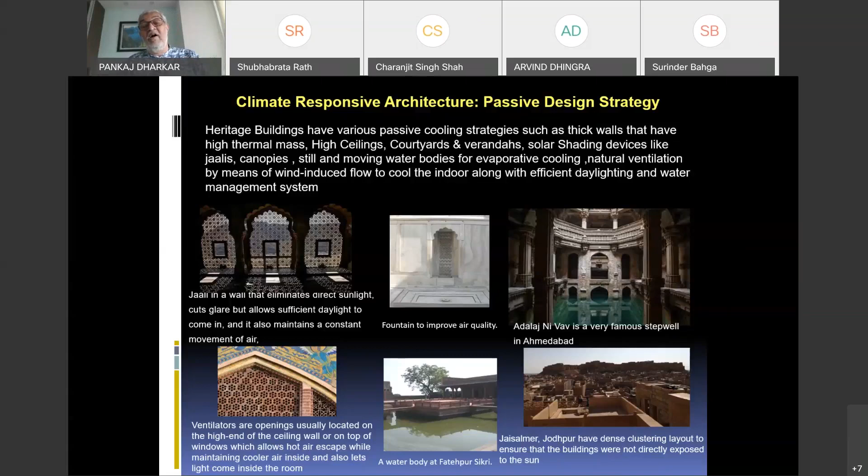If you see in our Gujarat itself, Adalaj ni Vav, that's a stepped well. Several kinds of ventilation which have been practiced, or a water body in Fatehpur Sikri, or the architecture of Jodhpur and Jaisalmer. These are all very passive design strategies and climate responsive architecture, standing stock for several hundred years.

Look at the Taj Mahal, number of passive technologies to keep interiors absolutely airy. Fantastic examples which the globe gets from India, and we have not taken advantage of such beautiful monuments, and probably not integrated our architectural and engineering services.

In fact, just 72 hours back, on a Lothal project in Gujarat, I was proposing a radiant system, and the architect was saying, Pankaj, what will happen if it doesn't work? I had to give him the example that look at Taj Mahal, it is standing tall for several hundred years. So why are you fearing?

So many architects don't want to even try these technologies which have existed for hundreds of years. Unfortunately, we have not integrated them into our architecture.

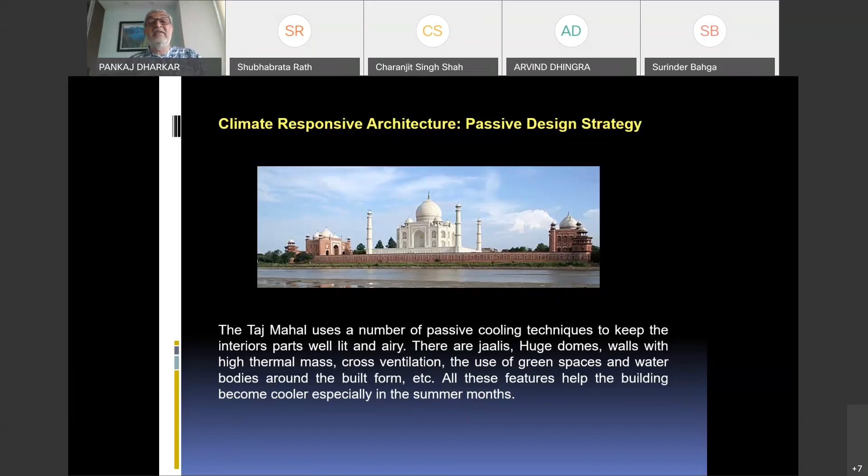Look at Taj Mahal, Hawa Mahal at Jaipur - such a beautiful Venturi effect. We have not taken advantage of such Venturi effects. Probably we have not scientifically analyzed how these jet velocities got created.

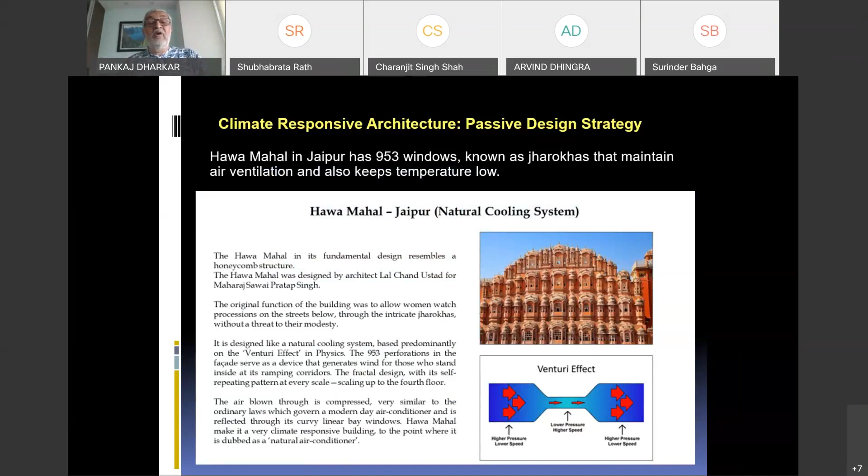Even a place like Jaipur, which was hot and dry, shows how the cooling effect gets created with Jali design. And this requires a lot of research work. I'm sure the next generation can take full advantage of it.

In the last 25 years we have not practiced it, but I am very confident that new generation architects are going to learn from our mistakes and ensure that these heritage examples which we have in India are nicely implemented in modern architecture.

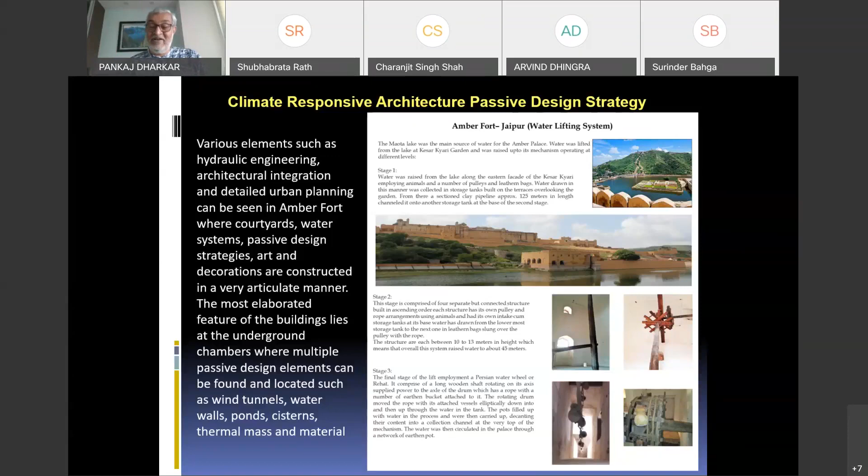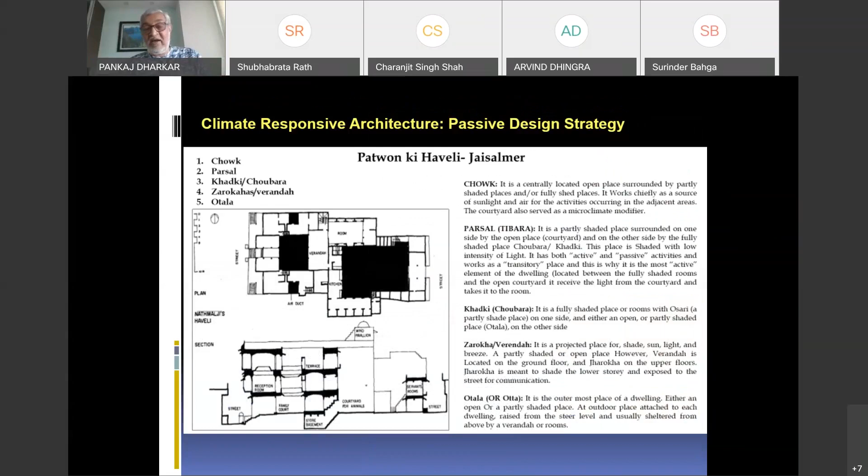Look at the Patwon Ki Haveli, Jaisalmer, again a very hot and dry climate, how the courtyards and the stacking effect created this beautiful cooling effect.

I belong to Indore. Near Indore we have a beautiful place called Mandu, which is 2,500 feet above sea level with no source of water. The river Narmada is 2,000 feet below this Malwa plateau, and all the rainwater coming onto it, about 40-45 inches of rain, is so beautifully channelized. There are such beautiful examples of rainwater harvesting that I think we don't require to go to the outside world. This is India which can teach them.

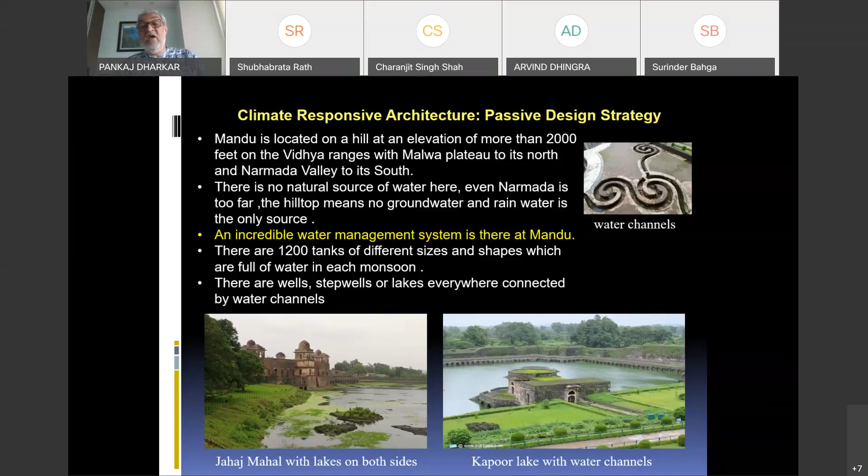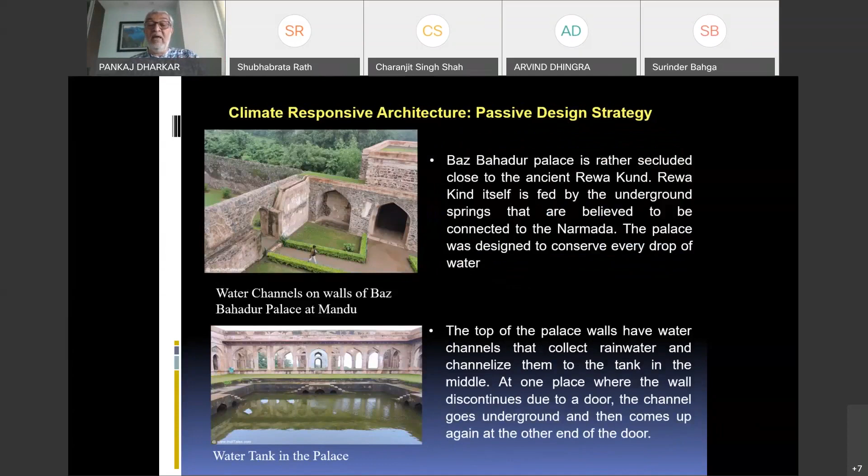Look at the water channels, water bodies, even the courtyards - everywhere there are extraordinary examples of rainwater harvesting, whether it is Baz Bahadur Mahal or courtyard tanks.

It's fantastically done. So friends, passive technology takes advantage of local environment, maximizes comfort and minimizes energy use, and addresses any climate change response. It has been seen that passive technologies like ventilation, windows and wall shading devices, natural cross ventilation, trees, water bodies, courtyards, verandas and thick walls are very effective in maintaining indoor comfort conditions.

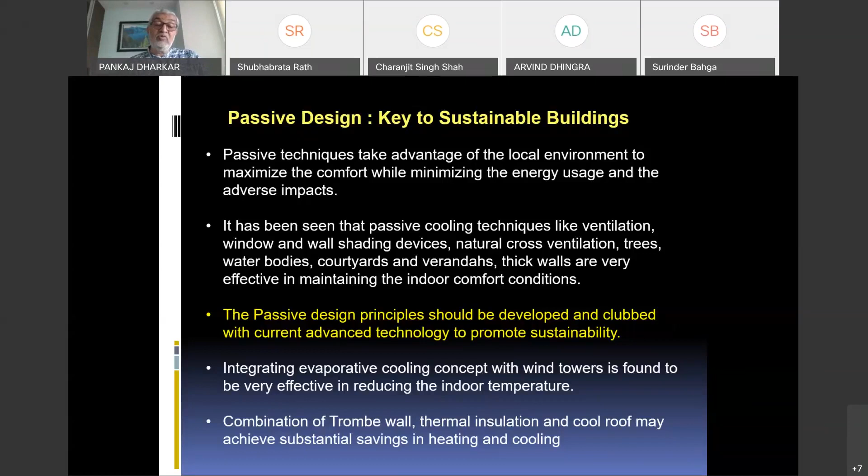Passive design principles should be developed and clubbed with current advanced technologies to promote sustainability, which is what we at ASSOCHAM are promoting. Integrating evaporative cooling concept, as Charanjit Singh ji just mentioned, with wind towers is found to be very effective in reducing indoor temperature. A combination of trombe wall, thermal insulation and cool roof may achieve substantial savings in heating and cooling.

Friends, we have several new examples which are coming up, but I really feel these examples are not to the extent needed, as we all know that 70% of India still needs to be built by 2030.

If you see examples like one I was fortunately associated with at the primary concept stage with Nimish Patel Saab - he is no more, we lost him a couple of months back - a fantastic architect who designed the Udai Vilas Palace of Oberois in Udaipur. This is a live example. He did it 20 years back, adopting the latest technologies with passive architecture. This building consumes just one-ninth, and it has been standing for 14-15 years now.

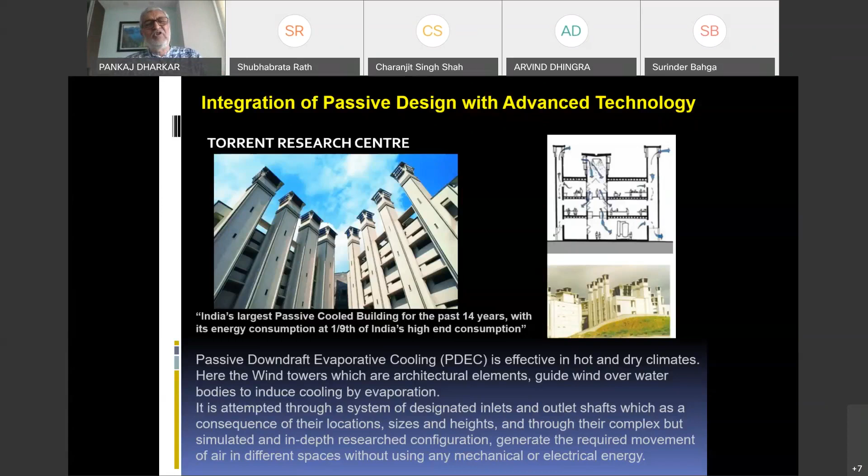But how many such examples exist? Very few. I think the new generation listening to this, and delegates, must learn from several good examples which exist in the country, and we should ensure every building that comes up in future has passive technologies.

With this vision in mind, ASSOCHAM GEM is giving a lot of emphasis on passive architecture, heritage in architecture, and climate responsive architecture in our program. With 400 chambers and 4.5 lakh members, we want to ensure our country competes in business globally, and I think the built environment is going to play an extremely important role.

With this, ASSOCHAM has taken a green initiative to care for Mother Earth, and with that intention CGEM has been formed and is now working very actively. Our program goes from GEM 1 to GEM 5 - GEM 1 being lowest with 40 to 49 points on a yardstick of 135 points, and GEM 5 given when you exceed 105 points.

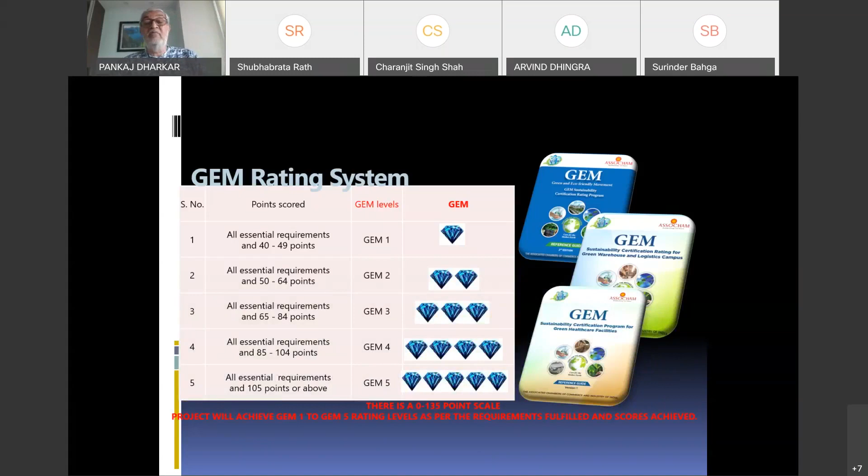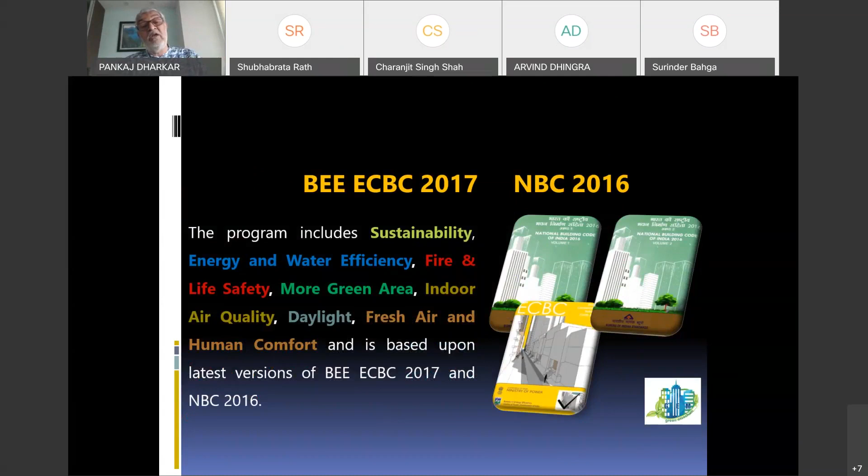Our program includes sustainability, energy and water efficiency, more green areas, indoor air quality, daylight, fresh air and human comfort. This is the only program in the world which also addresses fire and life safety - you'll see today's program is also supported by FSAI. We believe a building has to be sustainable, energy efficient, maintain good indoor air quality, but also be safe from a fire and life safety perspective, so we have a special credit for it.

GEM is continuously improved to align with United Nations SDG 2030. It is the first comprehensive rating system in the world to recognize sustainability as a whole rather than incorporating just a few components. Friends, we have started getting recognition from various state governments, and it is a testimony that recently the Rajasthan government has taken GEM along with IGBC, USGBC and GRIHA certification, extending all the facilities they extend to other green building certifications.

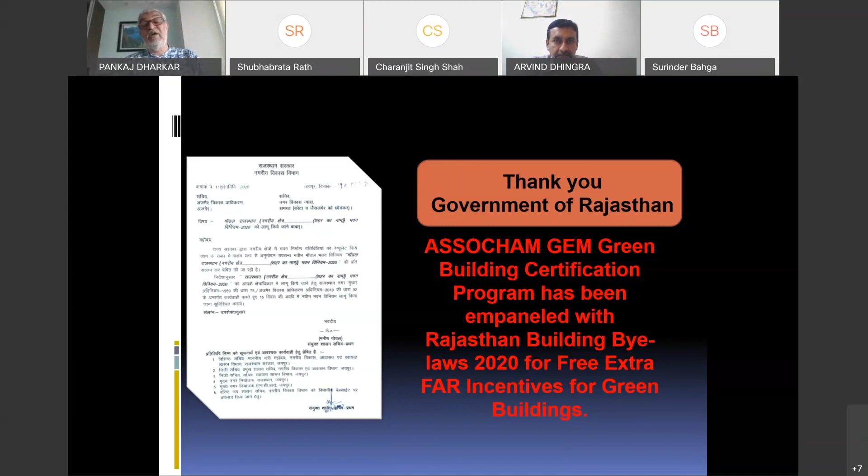I'm sure under the able leadership of Surinder Bahga Saab and our other team members, we are going to get this recognition in Punjab very soon. I'm confident, sir, and looking forward for these days.

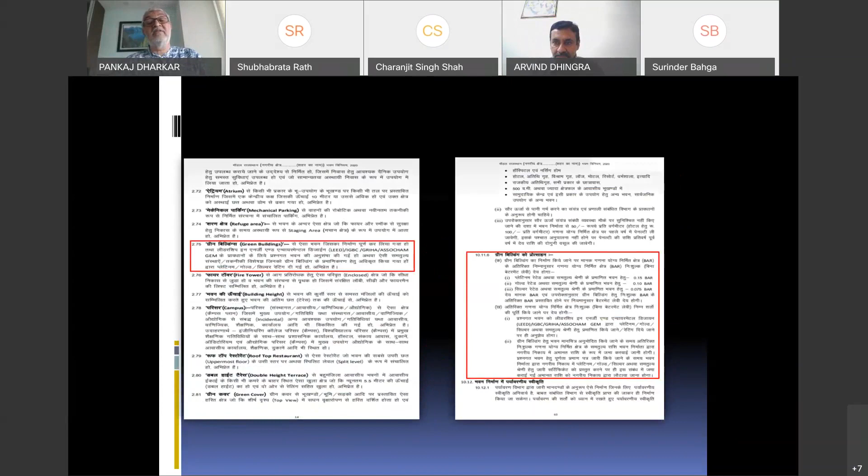You can look at how Rajasthan government has recognized this, and this is also now recognized by CRISIL, the organization which is putting GEM along with the IGBC, USGBC, and GRIHA certification program.

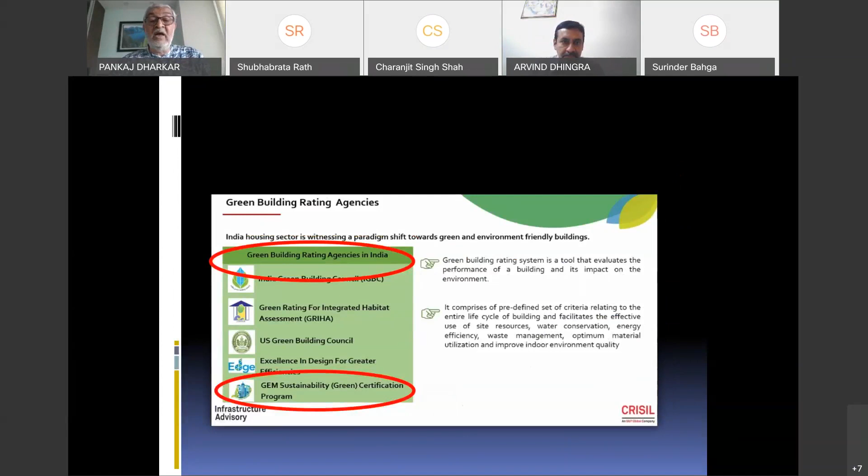We believe that for any green building certified project, if it is the starting point, there are no additional costs. But if for certain technologies you are putting in additional cost, you will surely get a payback within 3 to 4 years. And friends, these buildings are meant for 50 years, so this payback of 3-4 years is nothing, because you are going to save year after year. This is what sustainability is all about.

You can see here buildings from universities - there are multiple universities. Very interestingly, the Kartarpur land port terminal in Punjab, done by none other than our good friend Charanjit Singh ji and his son and team, which they gifted to our country, is also GEM certified - GEM 5 certified, the highest rating given to that important project.

We are unable to share our presentation. Can you help us, Shubha? Please give us permission. Done, sir, you have the presenter, right? Yeah. Since time is short, I will rush through the presentation because many other speakers are in the pipeline. I'm going to talk about climate responsive architecture. Sorry to disturb you, sir, can you make it full screen mode? We cannot. Okay, full screen. Thank you, sir.

In most historical religious scriptures, there is mention of preserving the climate and saving the environment. These are lines from the Holy Purana which lay a lot of emphasis on trees. Likewise, as Shah Saab has said, there are many shlokas in the Holy Guru Granth Sahib emphasizing saving water and saving earth. Similar sentiments are written in the Holy Quran, with many ayahs saying that we should save the motherland. The Bible also conveys the same kind of wisdom to mankind, that we should save the fertile land, for only then can we eat its fruit and enjoy this earth.

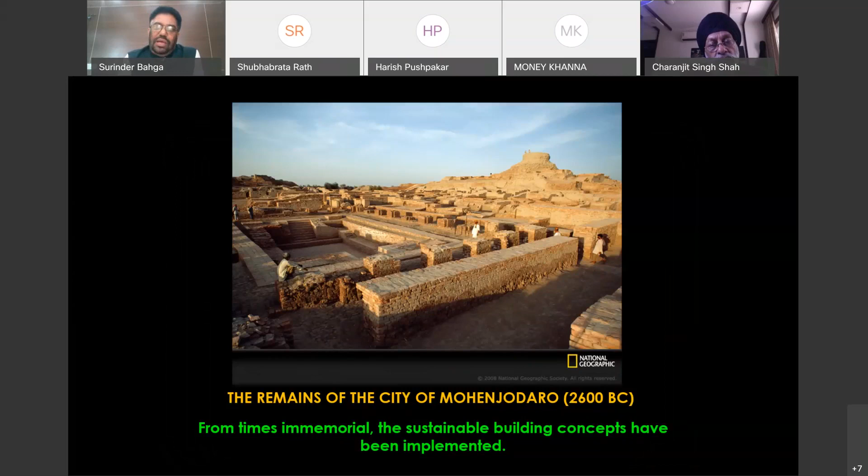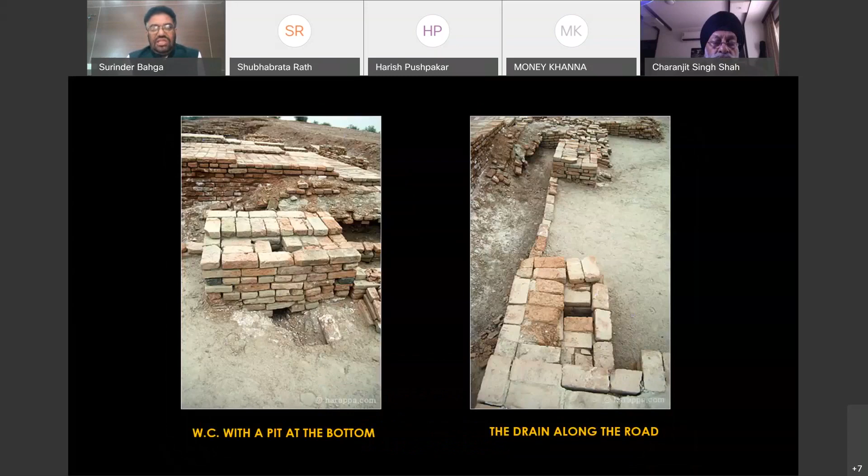If we have a quick look at the historic architecture of India, in the Mohenjo-daro township there was a lot of focus on respecting the topography, the wind direction, and local materials. There was even a drainage system which was properly laid down. This was a 2600 BC project, so ancient, yet the people were so advanced.

And in Havelis in Jaisalmer, as Mr. Dharkar was saying, we have used local materials, courtyard planning, jharokhas and jalis to protect the buildings. Nearly 200 years of the Mughal Empire, architecture was quite excellent in India. There was the landscaping of Taj Mahal, and in the 17th century, Jahangir Palace was built in Orchha, which has thick walls, and all the windows are protected with chhajjas and projections. This is the kind of architecture India was having.

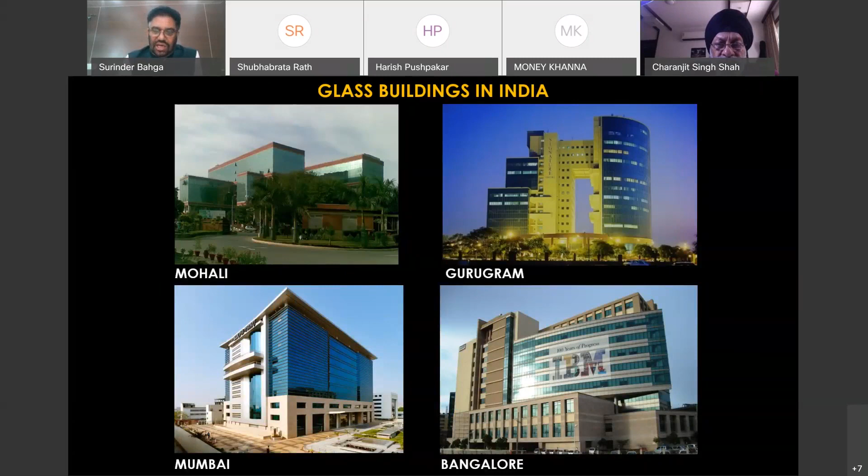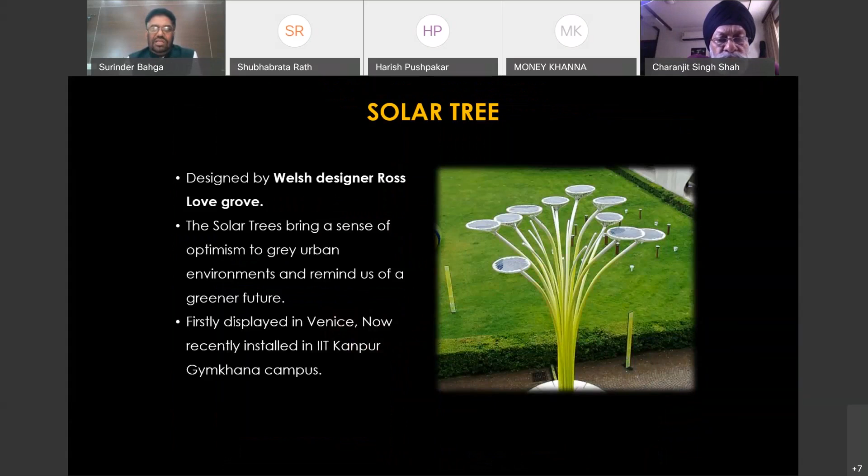I will briefly talk about some new technologies. This is the solar tree. When we have less area and need more light, this tree designed by Mr. Ross Lovegrove from Wales comes in useful. He has invented this solar tree, and in many parts of India, this is being installed.

Another South African architect, Shaun Killa, has designed this Bahrain World Trade Center, about 800 feet tall, with 2 towers connected together by 3 bridges. All 3 bridges support wind turbines, which are as big as 95 feet or so, and they can be repaired through these bridges itself.

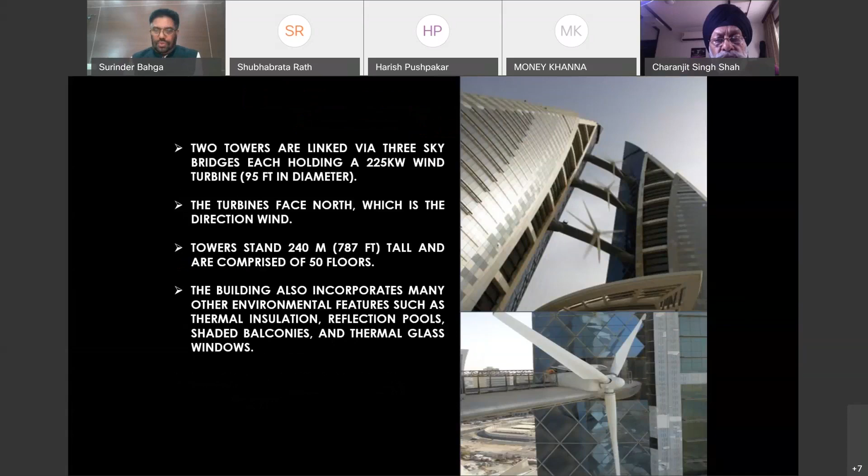The architect claimed that 15% of the total energy consumption of this building can be met with these wind turbines. This is the close-up of these wind turbines.

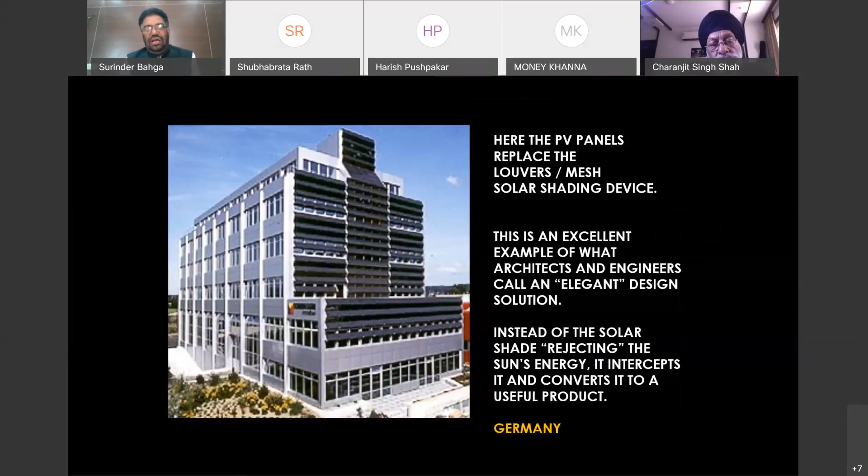The conclusion of the talk is that India is divided into different climatic zones, and each zone has its own guidelines. We should adopt new technologies and design buildings suitable to the local climatic conditions. We should not follow Western concepts, because by copying Western concepts, we will be damaging the Mother Earth. Thank you so much.

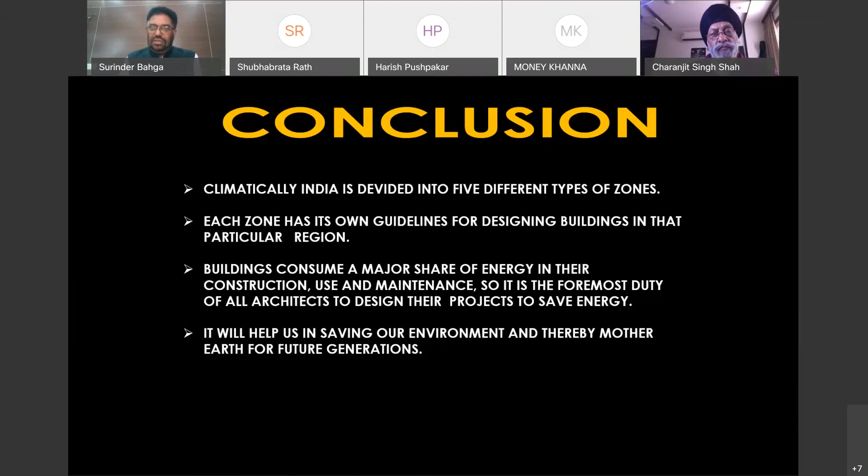Thank you, sir. So the emphasis was on the 5 elements of nature, as you can clearly see. Mr. Bagha gave clear indications from Matsya Puran, Guru Granth Sahib, Quran, and Bible, and he started with the great design called Weathercock in Chandigarh. Then how everything was designed so that vertical things can be used also—the solar, vertical farming. I worked in the World Trade Center, Bahrain, with the same construction contractor that built this World Trade Center. So I could completely relate to all these things, the architects and the beautifully designed passive design strategies, plus the urban strategies coupled with solar and vertical farming, the different kinds of concepts. And now we'll move to our next presentations.

Good afternoon, everyone, and the elite panelists with me. It's really a pleasure to be in such a gathering and talking on climate responsive architecture. I would just go through the slides first, then put forth my point of view. My co-speakers have already shown some buildings which are climate responsive, but have not gone back to the era beyond the Mughal era. So let me go back a little more and see what we have.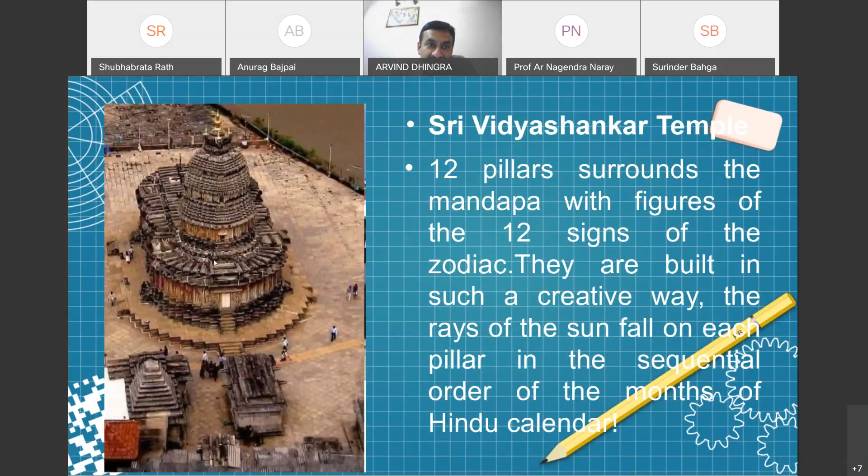Another example is the Vittal temple. Here, all 12 pillars are made of the same granite, but each pillar, when struck, produces a different sound. Again an architectural marvel, standing for over 2,500 years.

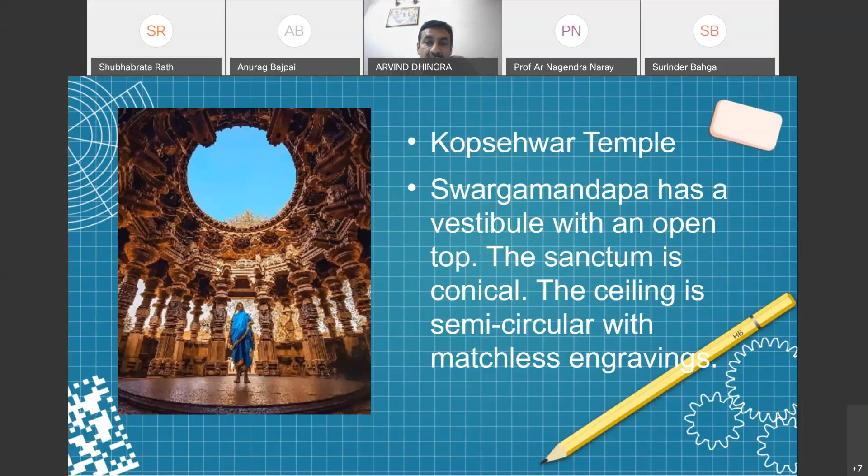Another example, the Kopeshwar temple. Here, the Swarg Mandapa has a visible vestibule with an open top. We are trying to create some kind of buildings nowadays with this kind of top covered with a transparent cover. The sanctum is conical and the ceiling is semicircular with matchless engravings. This is again an example of architecture.

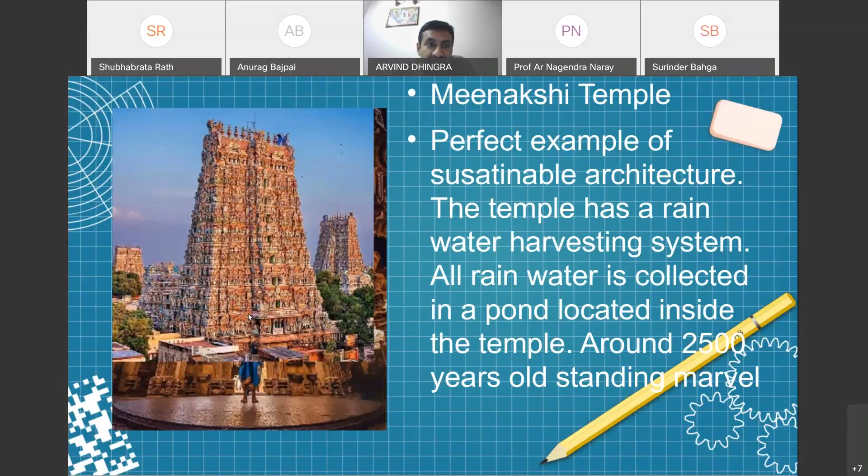Another example is the Meenakshi temple. It's a perfect example of sustainable architecture. The temple has a rainwater harvesting system built prior to the Mughal era. Not even a single drop of rainwater falling on this temple goes to waste; it goes into a pond located inside the temple. So we had climate sustainable buildings.

Another standing example of an inverted temple building is the Rani Ka Vav, located on the Saraswati River. The Saraswati River, as we all know, is nowadays not visible; it is said to be an invisible river. This is one of the oldest and finest step wells in Gujarat. Steps lead down through multiple levels with lines of carved pillars, and more than 800 sculptures. The step well is made in the form of an inverted temple, highlighting the sanctity of water.

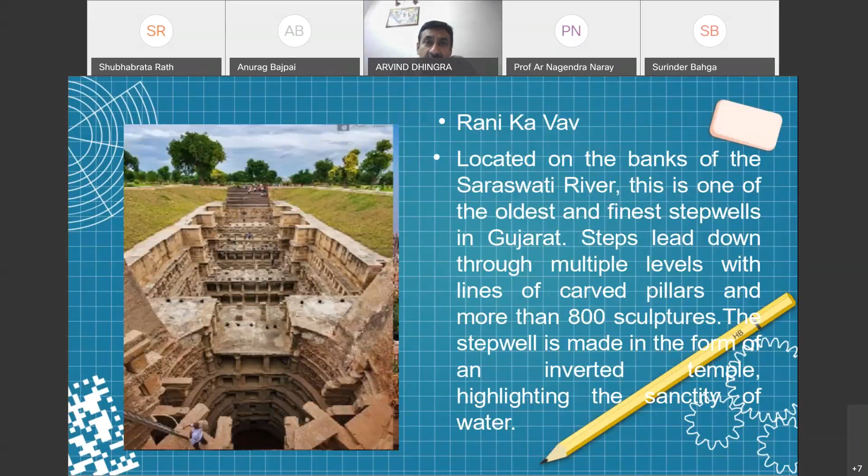So from the beginning, from the mythological eras, we were all inclined towards climate sensitive buildings. Now, moving to the modern era, we have some buildings which show Indian architecture in present day's light. We have divided the Indian scenario into 6 climatic zones.

If we talk of hot and dry climate, as in Jodhpur, the example is the Solar Passive Hostel in the University of Jodhpur. It was designed by leading architect Vinod Gupta, and the building was an attempt to test as well as exhibit methods that would provide thermal comfort in the hot and dry climate of Rajasthan. Temperatures here rise up to 50 degrees centigrade, so it had to be made such that inhabitants do not feel that much heat. The building houses 14 double-room suites as accommodation for married students, split between the first and ground floor, which is partially sunk into the ground to take advantage of the natural insulation of the earth.

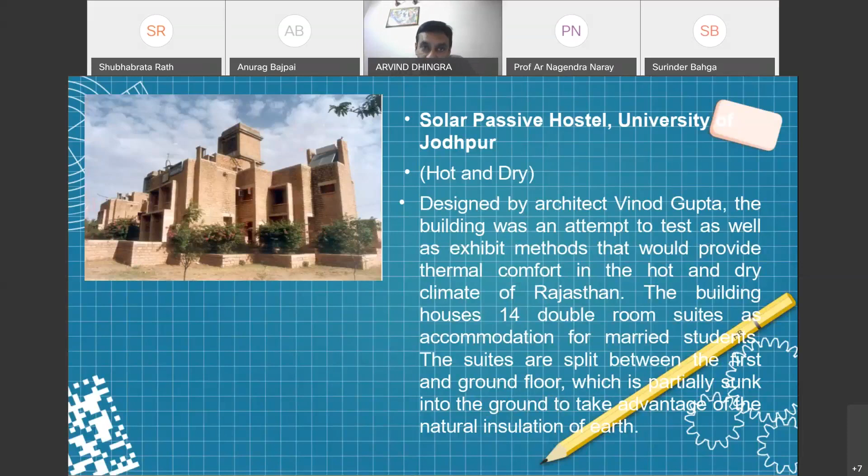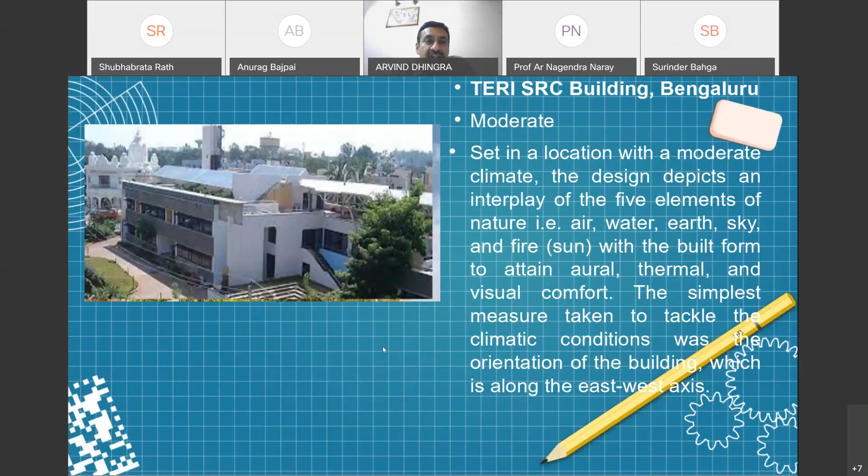Another example from a moderate climate area is the TERI SRC building, Bangalore, a modern architecture example set in this climate. The design depicts the interplay of five elements of nature. As my previous speakers have highlighted, Bhagwan was the acronym given by Nagendra sir: air, water, earth, sky, and fire, with built form to attain aural, thermal, and visual comfort. One of the architects, Jasim Roy, is here. The simplest measure taken to tackle the climatic conditions was the orientation of the building along the east-west axis, so building orientation again plays an important role.

Another example in the cold and sunny climate in Leh is the Degree College and Hill Council Complex in Leh Ladakh. The institution is built on a rectangular site along the north-south direction, surrounded by snow-capped ranges on all sides. The individual structures are oriented in various directions and treated specifically based on their orientations. The buildings on the north side have thick walls to minimize heat loss, while those on the south maximize heating and daylight distribution. Just see how beautifully it has been designed.

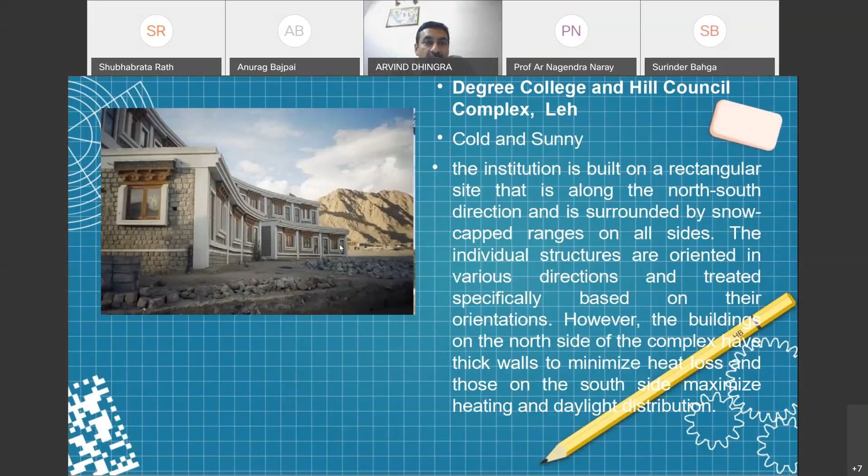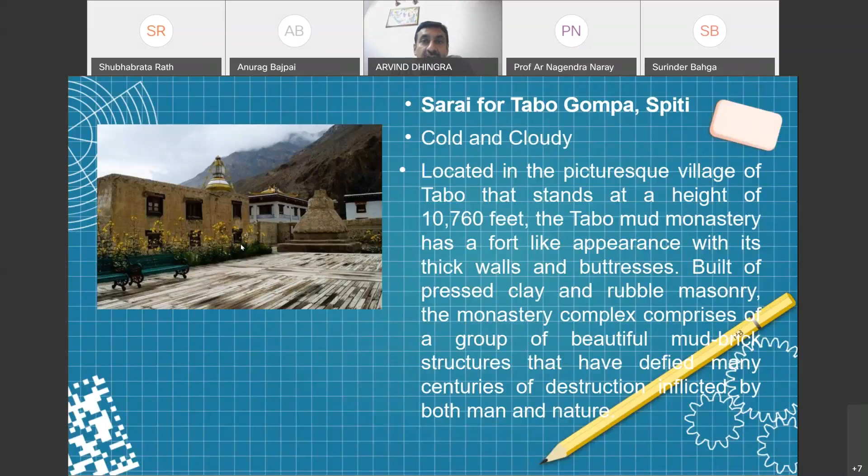So before I say thanks to everyone here, what is required from us is that we need to integrate, we need to build upon our history and our mythology and take tips from them, integrating them into our modern building designs so that we have energy efficient buildings. We have umpteen examples to show, like the PEDA building, which is a 5-star building in Chandigarh, and the HAREDA building in Haryana, again almost a net zero energy building. There are a number of examples we have got here. It is really a topic which needs a little more introspection and application so that we are able to have a truly climate sensitive building. Thank you very much for giving me the opportunity to be here.